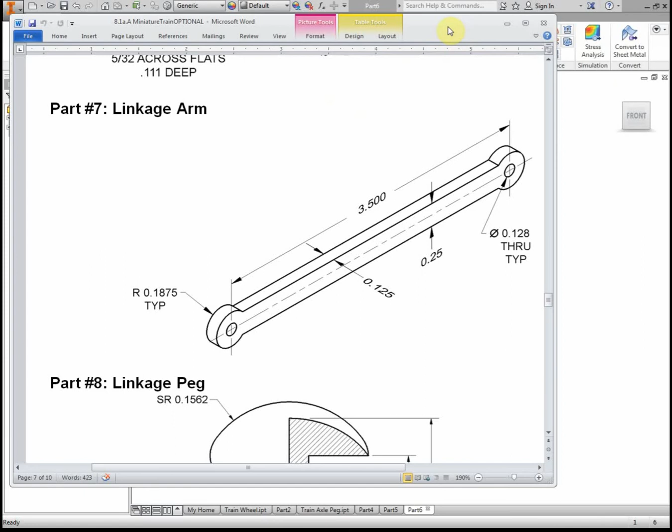Hello everybody. I'm going to show you today how to make the linkage arm. So we're going to start off with a big rectangle, and then we're going to put two circles on each end. We'll extrude it out, then we'll cut out these little holes. And I'm going to use that with just a circle pattern because they're just holes that go all the way through.

Start a sketch. I need to first choose the correct plane. There's really no wrong way because we can always edit that later. But I'm going to choose the YZ plane so I'm in the correct orientation in the beginning. Starting off with a rectangle. I'm going to type in my dimensions as I go, so I'm going to have a 0.25 height, 3.5 width.

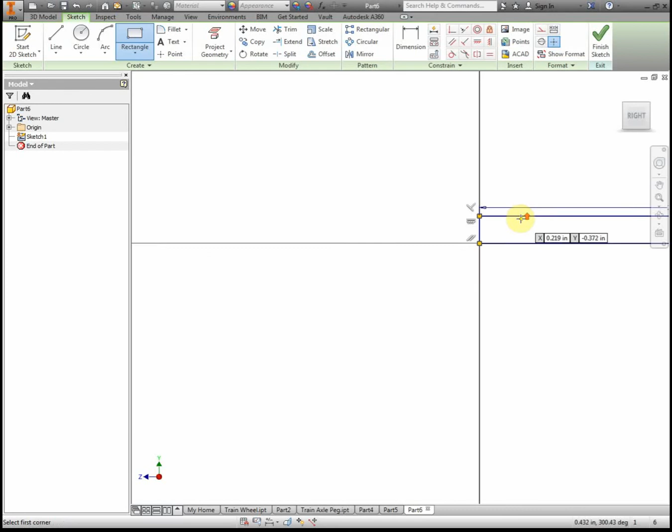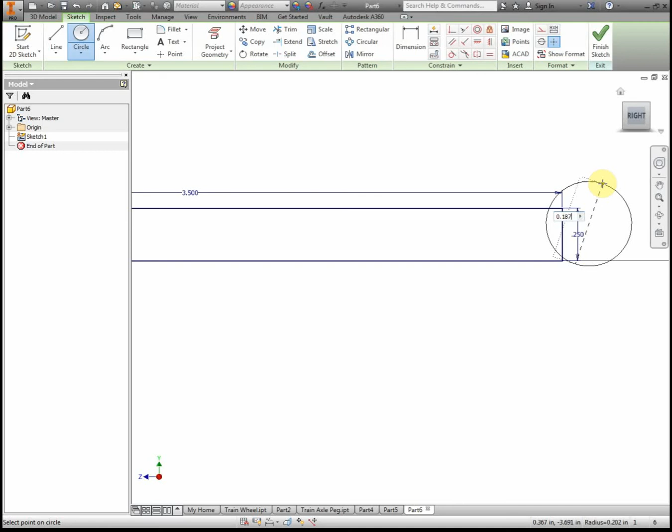Now I need to make some circles on each end. And for me, it'll snap right to that middle on this right edge, which is where I want it to be. But just in case you guys have issues, I'm going to do a general circle and then dimension it to where it needs to be. That way I'm guaranteed to get that right on this side. They provide me the radius of this larger outer circle here, and it's 0.1875. Multiplying that by 2 gives me the diameter, which is how Inventor wants circles. So I have that on there.

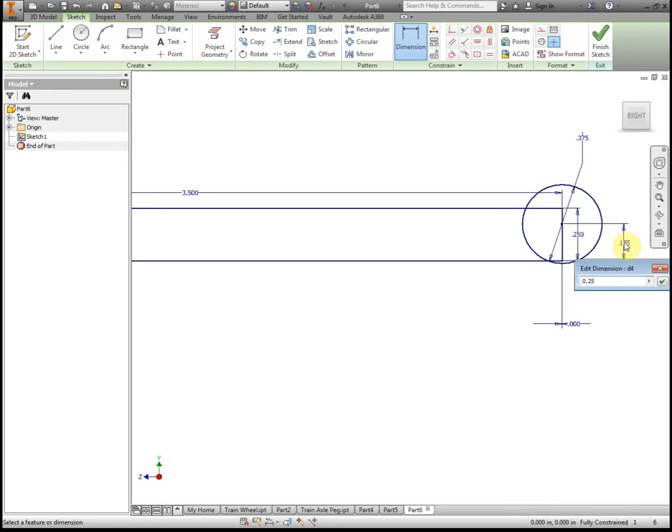Now I'm going to dimension from this center to this line, and I want that to be 0. I want it to touch that line. Now I have to make sure it's centered, so from the center of that circle down, I want that to be half of my height. My height is 0.25, so I divide that by 2, and now it's centered up and down. Do the same thing on my other side, except I'm going to let it pick my middle for me. 0.1875 times 2. Look at that.

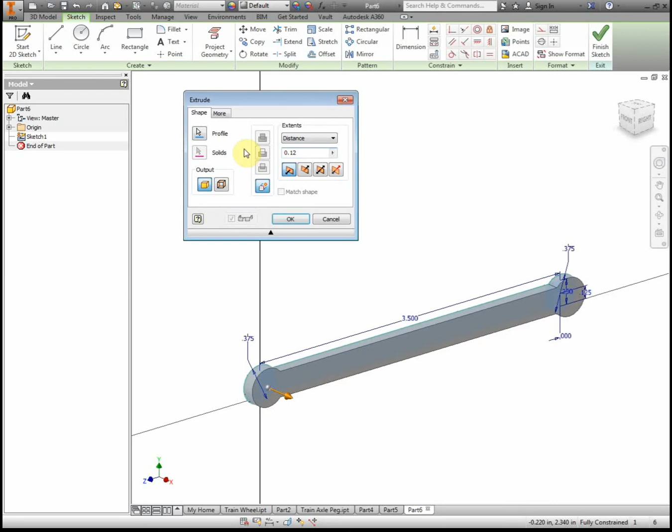Alright, now I'm going to need to extrude it, and I need to choose all of these. I can pick all of these sketches all at once, so I only have to extrude that one time. And it is only 1/8 of an inch thick. Alright, so there's that part. Now I just need to cut out the hole in each end.

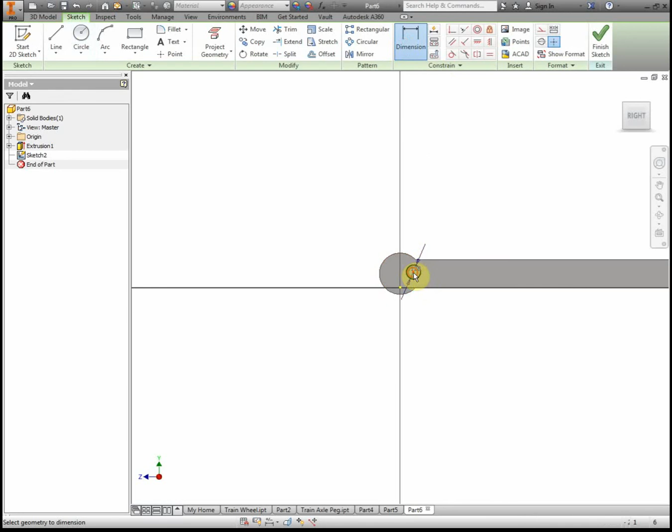So I'm going to start a sketch on this face, put a circle on it. I'm just going to do a general circle and make sure that it is dimensioned into the middle. Alright, so 0.128. Then I'm going to dimension this from the center here. And to be in the middle, I have to be half of the rectangle there, so 0.125. And I want to be 0 away on this side.

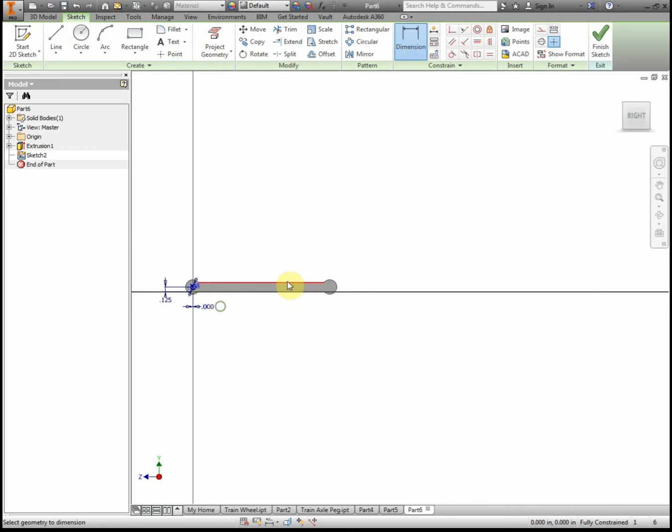Do the same thing on my other side. A circle. And it'll actually let me pick up off my other one the right height at least. It won't let me pick the right left and right. And again, 0.128 is my diameter. And now I have to dimension between them.

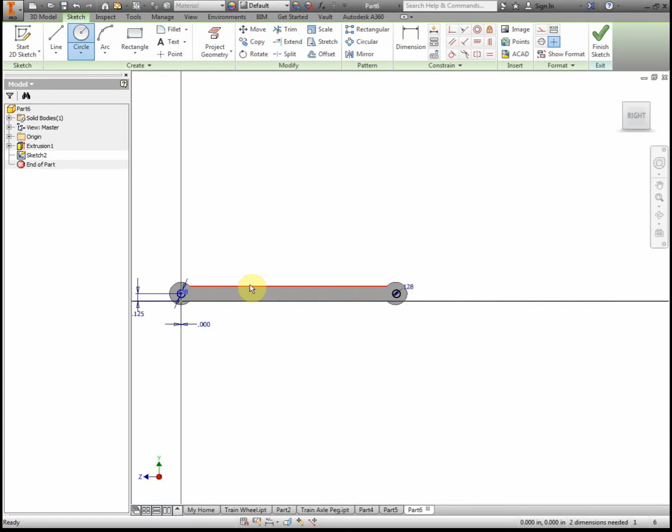So from here, I don't want to do circles. I want to dimension from the center of this side to my origin. I want that to be 3.5 exactly. So I was just a smidge off there. Extrude both of these circles, cuts all the way through, and done. There we are. Not too shabby, if I do say so myself.